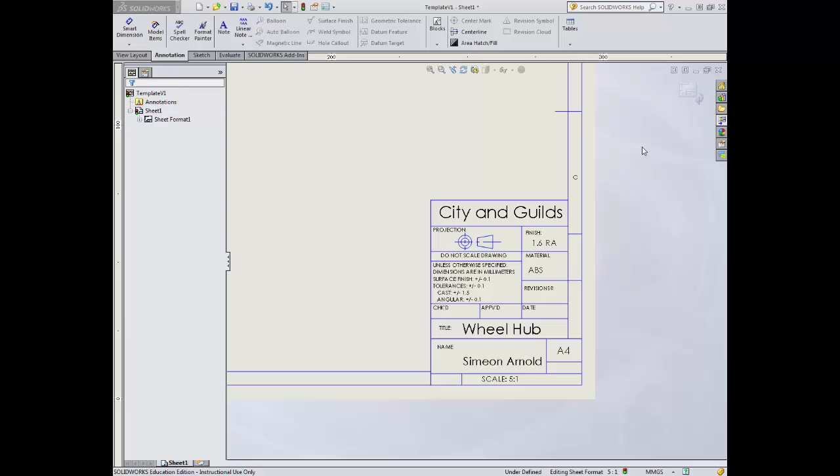Today we're looking at the wheel hub and the technical drawing. As you can see, we've got the wheel hub details entered on our sheet already in our format. I've entered the correct name, thought about the scale I'm going to use, and I'm going to edit out from that.

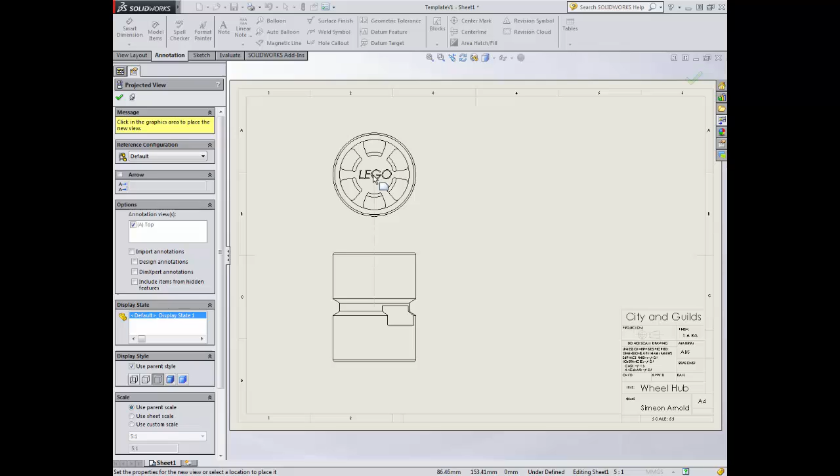Today we're going to be looking at adding in some simple views. Because this is a revolve, we don't have to have 3 views as we normally would, so we're going to have simply 2. I'm going to pop those in first. Using the parent feature, I can add in the hidden detail, so that's done there. This line that cuts in here is actually from one of the views I created, so I've just right clicked and clicked hide to remove it.

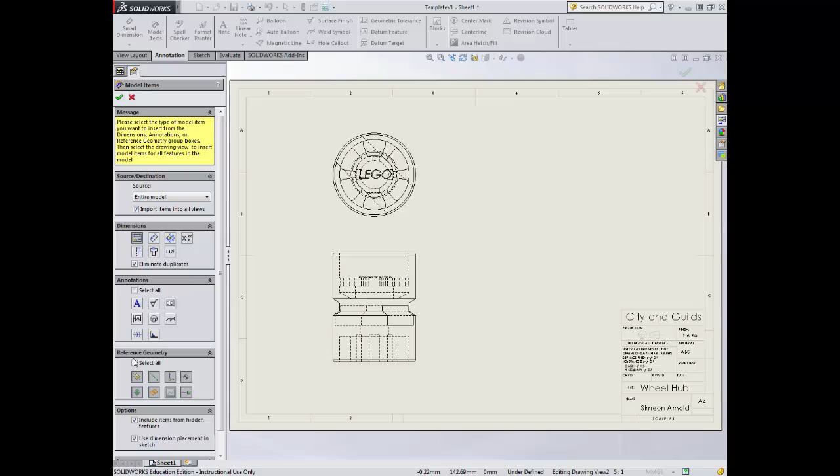Now we're going to look at using model items. Model items adds all the numbers you need, so entire model at the top, and we work our way down, check the various boxes here, and green tick. As you can see, that then gives us a lot of dimensions that otherwise you wouldn't have had.

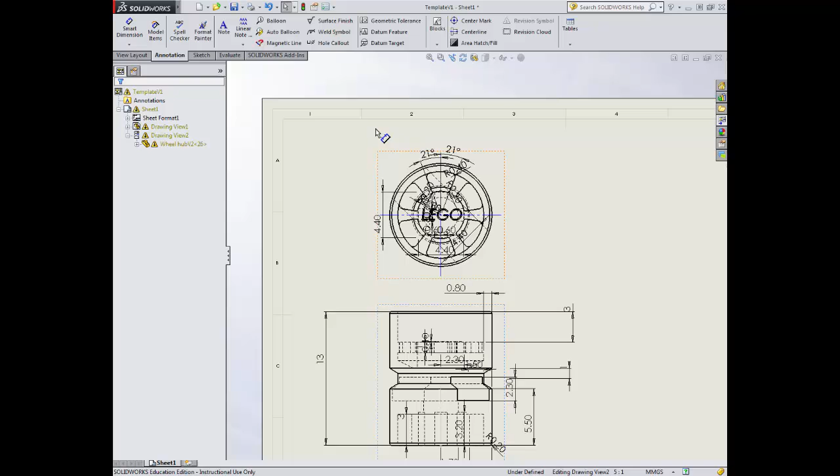So what I'm doing is working out the ones I want to keep. As you do this, move them off and sit them nice and straight if you can. For instance, this one here I could put at an angle, but I want it to be nice and straight. The neater and easier it is to read for the person looking at the sheet, the more likely they are to understand what you want them to do.

Remember, all your sheets should have enough dimensions on them so that a third party, someone with a bit of skill, could potentially remodel this. For instance, you should be able to give it to myself or Henry, and we'll look at it and should be able to make it from the dimensions you've got.

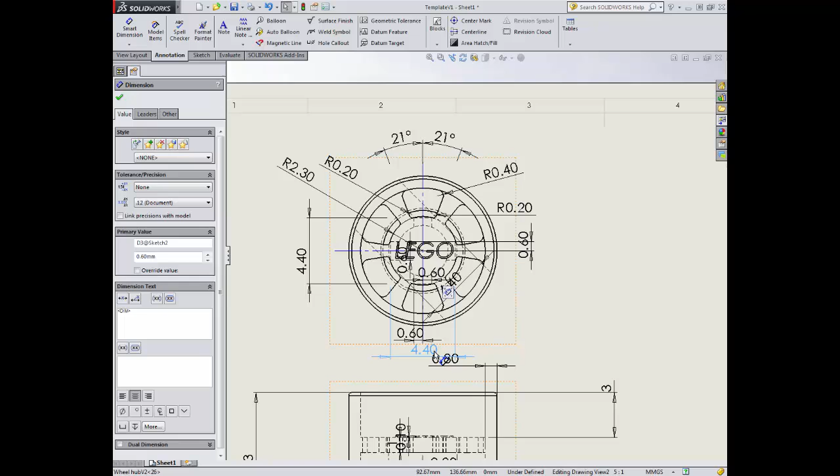As you can see here, I can move the actual drawing up and down so it doesn't overlap. I also want to avoid the numbers overlapping lines and various other aspects, so I'm just going to try and move them around and simplify them.

The video will now go through the process and show me shuffling these around. It's going to take me a little while, so cue some tunes.

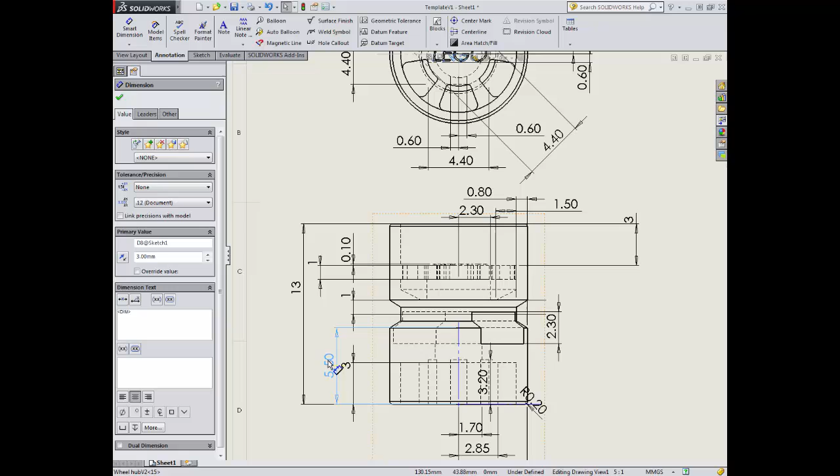So as you can see, we've gone through and neatened these bits up. If you want to see the final version of the sheet, you can go to the CAD folder on Moodle and look for the Wheel Hub Final Orthographic.

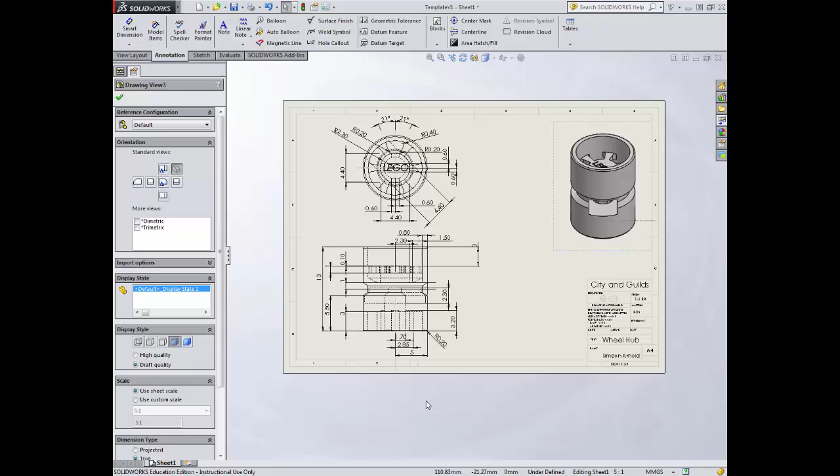You'll notice that at the start of this I didn't add in an isometric view, and that was done deliberately so that when I did the dimensioning using the model dimension tool, it didn't also dimension the isometric view. I want to add in a new view here as well, because obviously the top and the bottom are different, and we want to demonstrate that on the sheet to make it clear what we're looking at.

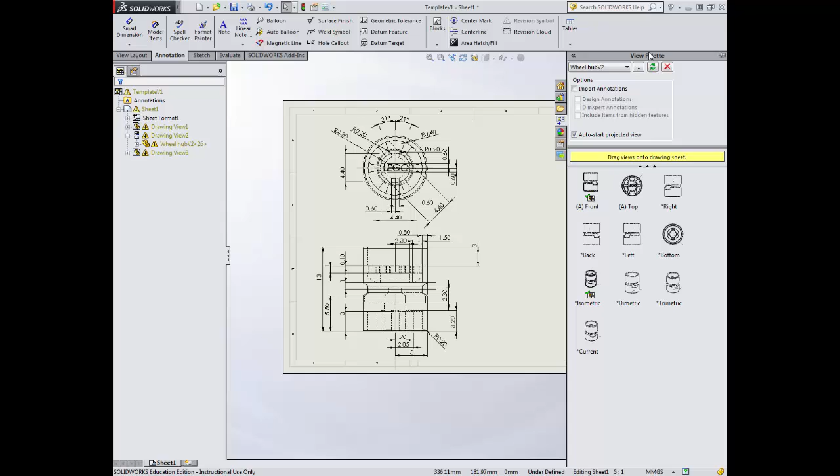So what I've done is moved this into a rough isometric on this page. I'm going to minimize that, and then when we go back to the technical drawing, go into our view palette again, and you'll notice that if we refresh it, the current view becomes the view we've just moved to on the actual model itself. I'm going to drop that one in as well. So now I've got my 2 views of the product.

I'm going to shuffle these around to give myself enough space. Again, I'm going to hide these lines, so right click on those lines and click hide, or you can click on the icon with the sunglasses. Again, I'm going to render those 2.

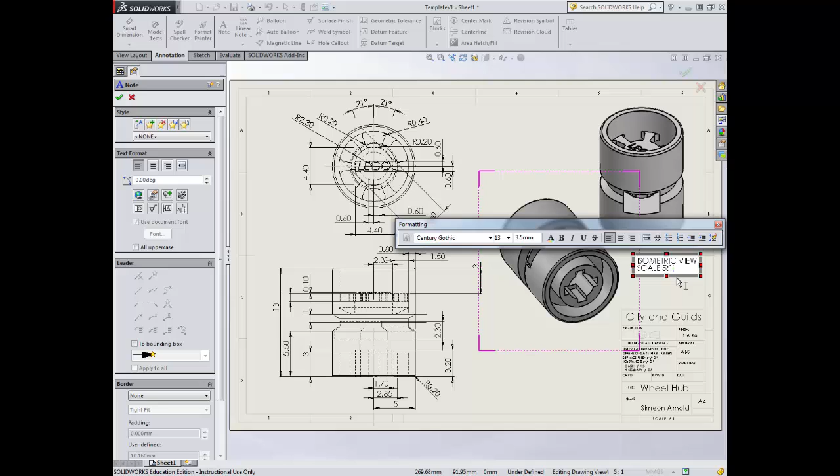Now I need to add in some annotations. So I've clicked the annotation tab, typed isometric view, and I'm going to give a scale to that too. If you're not sure of the scale, just click on the drawing and check what scale it says on the left hand side. So I'm happy with that scale.

Now I can copy and paste this, so Control C, Control V on the keyboard makes my life a bit easier, or I could have used the annotation tab at the top. I only want to change part of this, so this is then the alternative view. Stick to capital letters.

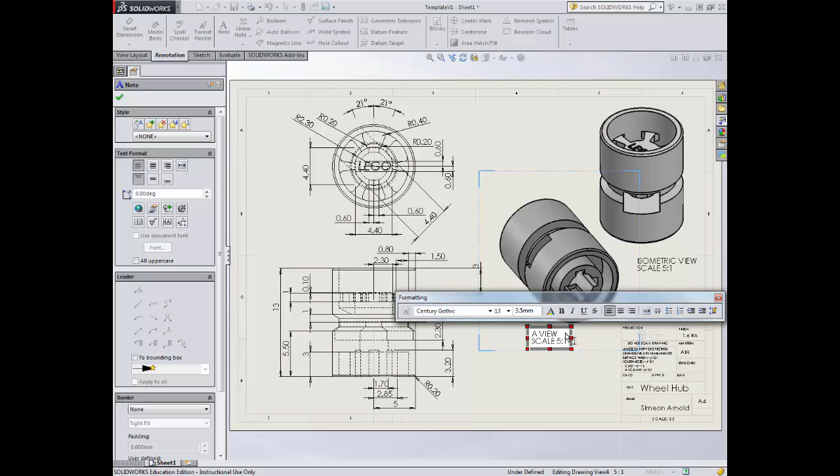Okay, and that is my sheet done, so you should be printing that off and handing that in for marking.